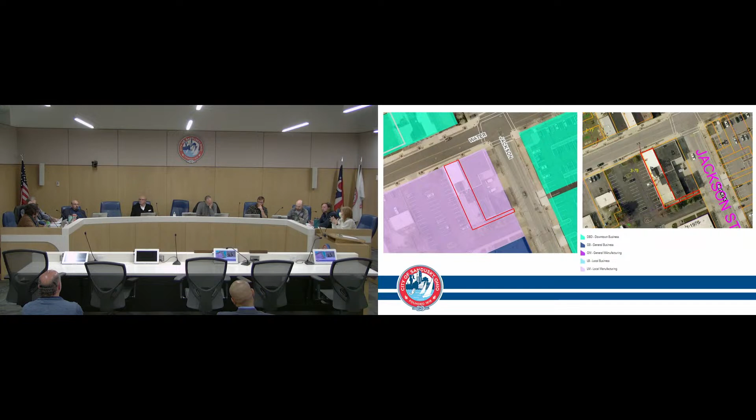Okay, I think as chair, I'm capable of making a motion. I'm going to move to approve the application as submitted and subject to staff recommendations. Second. Mr. Chairman, I see this request similar to that property at the end of Adams Street that we approved, Adams and Meigs. I think you're right on the edge, and it's similar to that, so I'll be voting yes.

It's been moved and seconded. Any further discussion or comments? Mr. Chairman? Yeah, Mr. Zula. Yeah, I was here for the downtown zoning discussion and formulating the map and everything, and I wish I remembered exactly what was discussed for that block. I don't remember what it was, but I can tell you that if I would have had my way, that area would have been rezoned.

So now you see the problems of spot zoning, or leaving things the way they are short term when it's inevitable that they change long term. But we're getting it done here, so it's fine. There's still manufacturing going on the corner there, and there's still manufacturing going on down the block.

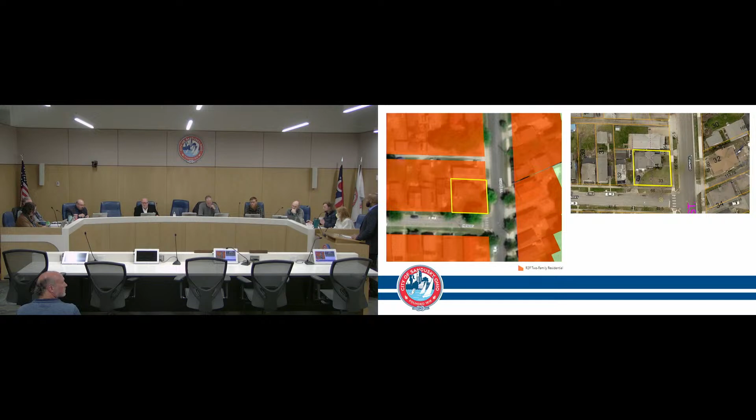Thank you. Any questions? Chairman, I'm not sure who to address this to, but this is a curious property, because it looks like Hendry Street. Let's see.

So one of the things that would have to happen here is you have to meet other standards to do this, or not, I don't know. If it were in an overlay district, you'd have to meet all kinds of standards, including a parking plan. Would the applicant have to do that here? Assuming our transient rental operations code gets reinstated swiftly, they would have to apply for a permit, and that includes a parking plan, in any district where it's permitted—that would be part of the permit. Right, I mean this would be a change of use, and if you did—I guess I don't know if I'm asking the right thing here.

Because they wouldn't be doing anything if they didn't propose doing anything to the site, you wouldn't need site plan approval. I'm not sure as a neighborhood business whether it would require a parking plan like it would if it was an overlay district, right? Yes, it would require a parking plan as part of the transient rental permitting process.

Okay, thank you for clarifying that. I have a question. The property has loads of curb appeal, and it's really a very beautiful house. Its setback, unusual for the neighborhood, is appealing too, but you could wind up paving that yard. Anyway, okay, thank you.

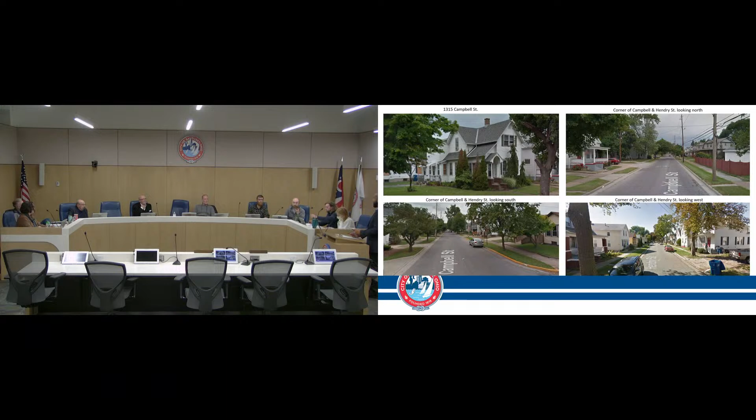Mr. Chairman, may I say something? Yes. I just wanted to say thanks for being here and spending your career here, and I'm glad you're here. We certainly don't love to say no, and I know it's hard to hear no, and we don't like to say no to investment. So please don't hesitate to give us a call, on your own behalf and on behalf of the folks you work for, to talk about where we can help you invest in the city. As you know, we do have districts, and had districts, and will soon again have districts where this is permitted. Am I getting this right? That would be correct. Some nice properties and some great opportunities.

Thank you, and I will add, enjoy the snow while you're here, while it's here, since you're from Florida. He lives here now. All right, Mr. Chairman. Yes, I just can't resist a little interjection.

Sorry, I started it. My daughter grew up here. When she graduated from college, she moved to California, hasn't really looked back, seldom visits. But apparently among her friends there's a community, maybe the phrase is digital nomads, these young tech stars who find they can work from virtually anywhere in the world, so they choose to do that. Among her friends, they think Sandusky is really ripe for a takeover. It's got interesting stuff, a modest cost of living, and they can't hardly believe this opportunity is out here. This is the kind of place they want to come, but they don't want to move here forever. They just want to come for a few months, like live a month in Denver and a month in Albuquerque, and others live six months in Thailand and six months in Cambodia. This goes right up the alley to a furnished apartment for a few months. So all you have to do is pass that 30 days.

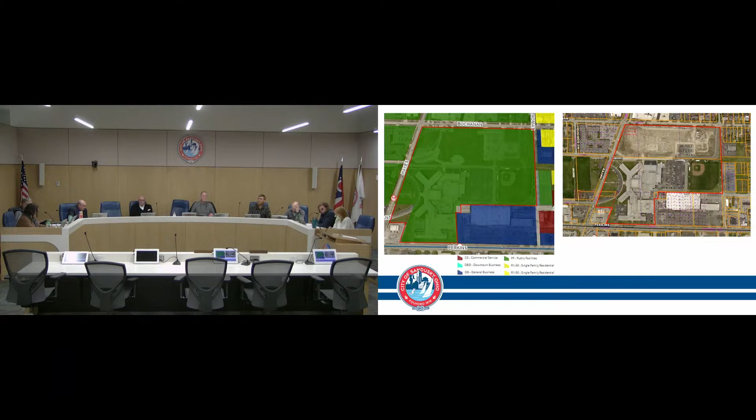The existing use of this site is campus for Sandusky City Schools, and the proposed use is also for Sandusky City Schools. They're proposing to add a natatorium attached to the current high school. The scope consists of renovating the existing pool locker rooms, converting the existing pool into an athletics multi-purpose room, family locker rooms, and constructing the new natatorium. The proposed plan will have a new seating capacity of 285 bleacher seats. The facility will be used by both students and the community. The hours of use are still to be determined. The proposed natatorium will be 12,200 square feet and will be placed on the east side of the existing high school building, on top of an existing parking lot.

If you look at the bottom right corner of the screen, that's the general area where it will be placed. This campus is approximately 13 acres. The total land coverage with this proposal included is 29.2%. Sandusky High School currently has 322 parking spaces, plus an agreement with an adjacent business for 30 extra spaces after hours, and 113 intermediate school spaces to the north. This proposal will remove approximately 56 parking spaces. The proposed height of this natatorium is going to be 26 feet.

The architect and the applicants are confident, after staff had talked with them, that the approximate 56 parking spaces being removed would not negatively impact the parking demand for the proposed facility or for school operations. Per the zoning code, no additional parking is required, because for public facilities it's up to the architect in a sense. The exact language is: public facilities and municipal education, number of spaces to be determined based on site development. So in this case, the architect is confident that the removal of the parking spaces won't negatively impact that.

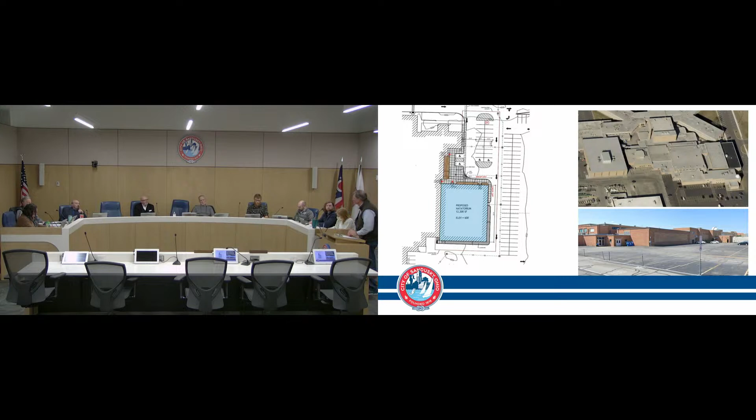I can answer that. Come up here, sir. Mr. Fike, I know who you are, and we all know, but maybe state your name for the record. I'm John Fike, I'm the owner's representative on this project.

Where we stand right now is funding has been completed. The school board has approved the design to start construction documents and get them completed. We hope to go out for bid in April, with construction starting hopefully in June, and then it's an 18-month project to finish.

If Mr. Miller wanted to contribute, he wouldn't be refused at this point. I can say right here, if you want to break out your wallet. The pledge was made long ago, and nobody has come knocking, asking for the check that we pledged. They will be once we get to the point where construction documents are completed.

Okay, any further questions? Mr. Chairman, I don't know if Mr. Fike is the one I should ask this. I get out on the street, having coffee or something, and get questions about whether this is the original plan or layout for this pool, or has it been downsized, or what is the final product going to be? The original plan, way back like 3 years ago, was to renovate the existing pool and add a pool.

Doing all the fundraising and then looking at all the space that was available, the footprint of what was going to go on there was much bigger than this, and the bigger the footprint, the more it costs. So with the money available, we cut it back to one large pool. We're going to eliminate the existing pool, keeping the locker rooms, and we're ending up with a pool, 8 lanes, which is exactly what we need for both the Sandusky City Schools competitive swimming, for their swim club, and for teaching our kids. Then in off hours, we can open it up for public use.

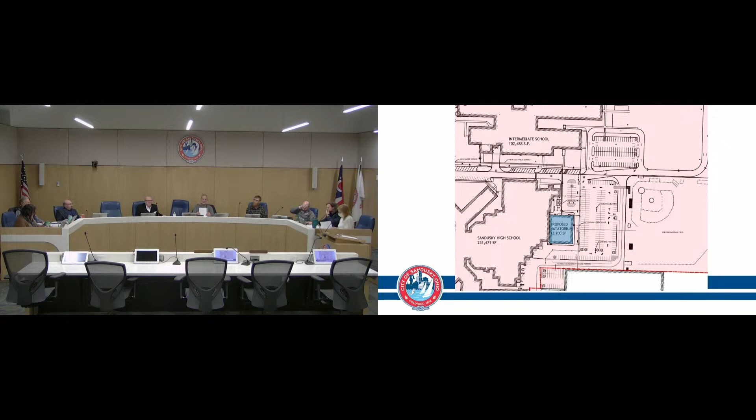Been moved and seconded. No further discussion, questions? I guess we'll call the question. Pete McGorry, yes. David Miller, yes. Mike Zuloff, yes. Connor Whalen, yes. Steve Pajali, yes. It's been passed. Congratulations, good luck going forward.

Next item on the agenda is a site plan submitted by Mr. Victor Huston to build a barber shop at 1502 Hayes Avenue. And perhaps the staff could educate us on that application. Yes, thank you, Mr. Chairman.

The site in question is zoned RRB residential business. The surrounding zoning to the north, east, south, and west is also RRB residential business. The surrounding uses of this property are both residential and business. The existing use of this lot is a vacant, undeveloped parcel. The proposed use is a business. The site is approximately 0.08 acres. The site abuts Hayes Avenue, which is a focus corridor in our comprehensive plan. This four-way corner historically has been a node for businesses and also residential use.

The applicant is proposing to buy the lot from the city and place a barber shop on the site. The property was obtained by the city of Sandusky in 2015 and is currently vacant in the city's land bank program. The new building will be approximately 14 feet by 32 feet, including 2 off-street parking spaces. The proposal would add a taxable parcel back into the auditor's database.

The parking standards are below the 25 required spaces to enable our landscaping requirement. However, staff has recommended low-level landscaping along the facades of Hayes and Osborne Streets. All area standards are satisfied per our zoning code. All yard regulations are satisfied. This is a permitted use. The zoning code does call for 2 off-street parking spaces.

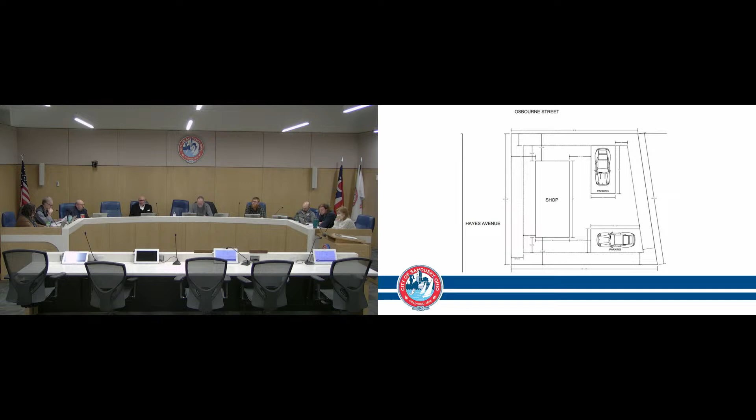So I'm seeing building 32 by 14. That includes the eaves, so it looks like the interior dimensions might be something on the order of 11 or 12 feet. Should be sufficient.

What was this, the zoning? It's residential business, so we're not worried about change of use or anything, or the legality of the use or anything.

So I think in principle I like the way the plan is conceived, in that we're not setting it back and putting a parking lot up front. We're doing a walkable, up to the sidewalk design. Customers are expected to walk up as much as drive up, right? So that follows a lot of the principles that we've been advocating.

As far as the aesthetics and so forth, that's highly subjective and not what we're interested in, at least in this venue or in this question. And I do agree that bringing the two cars in side by side would leave you some extra space for either future development or a lawn or something.

I think it would be important to condition this on fixing the apron so that you don't have excessive apron. It's a little bit of concrete work to make this look right. What we call the curb cut here resulting in an apron that's excessive. I don't remember the history there, but I think we should condition it on correcting the curb cut to match whatever is needed and nothing more.

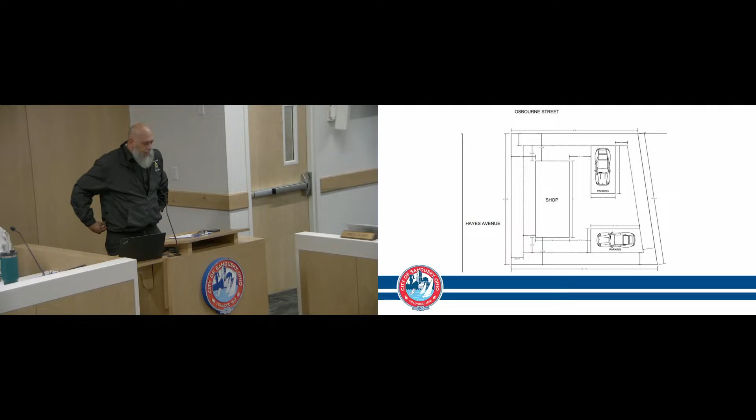I've been in the city since, well, I was born and raised here, on the south side of town. I worked in restaurant management for 25 years, left the area, came back, and I've operated a barbershop since 2011. Throughout, I've rented different places. I started out with Benny B's barbershop, worked with him, still friends. I worked in a few other locations, Stan Miller's Plaza out on Perkins Ave, and then recently on 1621.

Most of the places I've worked, I've been there for over 3-4 years in the concepts of working in these areas. The vision is the south side of town, when I grew up we had several barbershops in that area. Gordon's, Betty Lou's, Swain's Barbershop, Brown's, so there were 4 or 5 barbershops in that area, plus the Hardens was right there on Pierce and Hayes Avenue. Miss Coleman had actually taught at the high school, and she was on Campbell Street also. These were all within a block or two of each other, but they sustained a lot of families and brought a lot of memories in those areas.

These are family-owned businesses where the children grew up in them, and I was part of that. As a barbershop owner, I would like to bring that element back into the city. Things are changing, and I think we need to change with the time. That lot has been vacant for years, but I think it's a good lot for that purpose. You have an elementary school right down the street, and the middle school and high school several blocks down, and the kids are walking past there. All of them need haircuts.

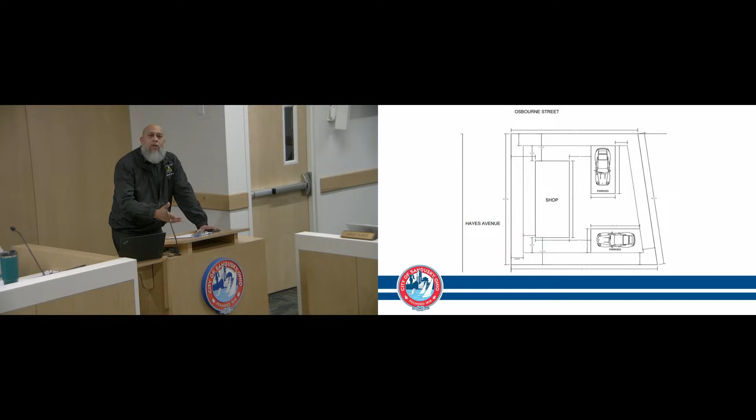The barbershop in itself is a place where a lot of kids can come in and get some direction, get a mentor there and other people. Not only is it going to do that, it employs 2 to 3 other people. It's not going to be a place associated with after-hours stuff that some barbershops are known for. I don't do that. I run a clean business. It's an LLC.

I've been operating that LLC since 2011. I pay my taxes on it.

Building-wise, I believe in the recommendations everyone has made on the parking, because I think it simplifies things a little bit. But the curb appeal, I like the setbacks on it, so I don't want to go to that zero variance where I can't have any curb appeal. You're coming down Hayes Avenue, you got the hospital right there, another business, and it's a main thoroughway right to downtown. Why would you just want a plain-faced building sitting on there? I would like a little shrubbery, and I believe low level, that should help.

So the vision is just to bring that neighborhood and that area back to some viability here in the city. That's my vision with that.

Like Alex said, this was June when I applied, but I had been looking at the building or that lot for several months before that. Before I made a move on it, it was just in June. So we've been going through all of that. We met with all the boards, the water department, building code, and so forth, to make sure this thing was doable. We're just at this point now.

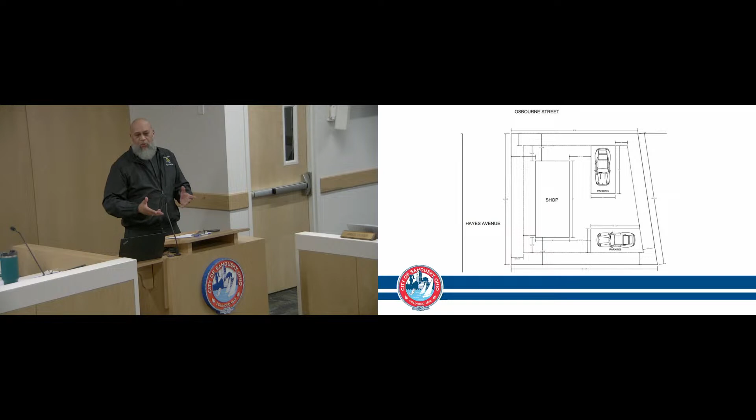So I'm ready to move forward if you guys are. It's just whether or not we're going to allow it to go. Those simple things you mentioned, my architect can go back in and change. The problem right now is he's on his honeymoon and won't be back for another 10 days, but I could have had that revamped and brought back in here. He's out, but when he comes back in, I could do that, and whatever else you need on there, I could have that taken care of. So if you have any other questions, I'll be glad to answer.

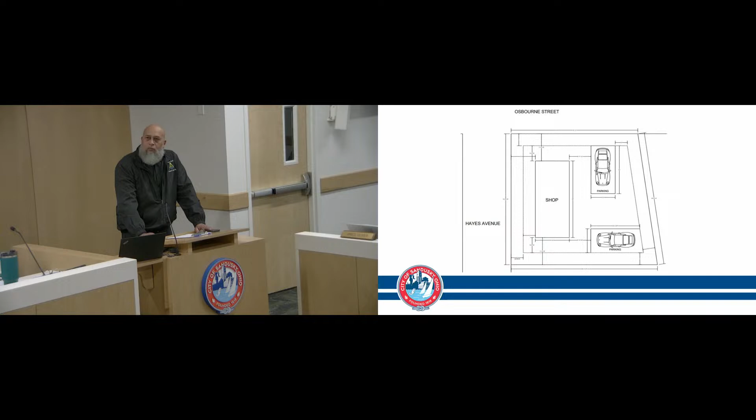Mr. Chairman, it sounds like you're amenable to making some adjustments. Absolutely. And I'll say that if you work with the staff, maybe on the walkable cities thing, the direction we're moving, I think you'll be happier and have a more valuable property in the long run if you considered it. Unfortunately the site plan isn't, so Hayes doesn't meet Osborne Square.

Yes, it's quite an obtuse angle. I think you'd be happier even if it wasn't even a square building, if you aligned the Osborne facade with the adjacent building, lined it up, and then aligned the Hayes Avenue facade with the adjacent building, which I think will take you a little closer to the sidewalk. I think you're gonna have something that looks like it belongs there.

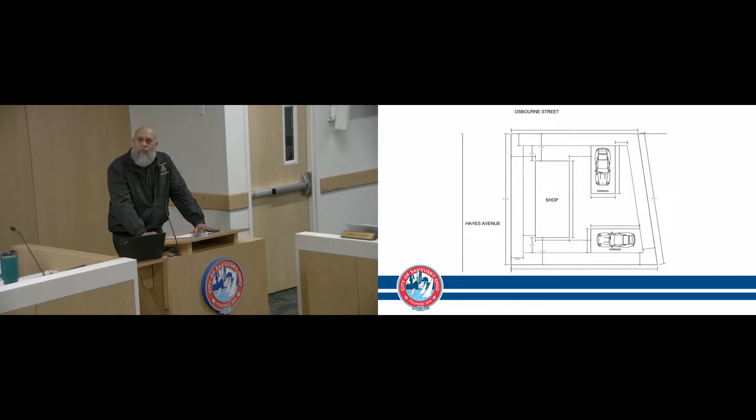Okay, it's just my thought. I'm not gonna tell you how to do it, it's not my job, but it's a thought, and it'll look like it belongs there. If you put it that way to your architect, aligning those facades with the adjacent buildings, I think you'll be happier in the long run. It's a little trickier, because it won't be a square building, but who cares, right? It'll look right.

Appreciate it, thank you. But in any event, maybe it'd be to your advantage if we table this so you can finalize your plan. Then there'd be no question, because if we approve this and then you start making changes, that could raise questions. If you still want to do a little work on it, we could table it for you if you want, and let you finalize your plans before we hold you to it. I'm just throwing that out there. I don't know what your reaction is, if you're in a hurry or not.

I think the sense is I can feel support from this body for you to build your barbershop, and we want it to be a success, so just a thought.

Do we have a motion? I kind of invited you to respond to the question of whether we could table it. I believe we have a motion that's been moved and seconded, is that correct? You can. Yeah, what's your point? That we have a motion that's been moved and seconded. Right, let's call for the vote.

You can table the discussion any time and take it up at another time. The question is, would the gentleman prefer some more time to work on this, or would you like an answer today? I would like an answer today. Thank you.

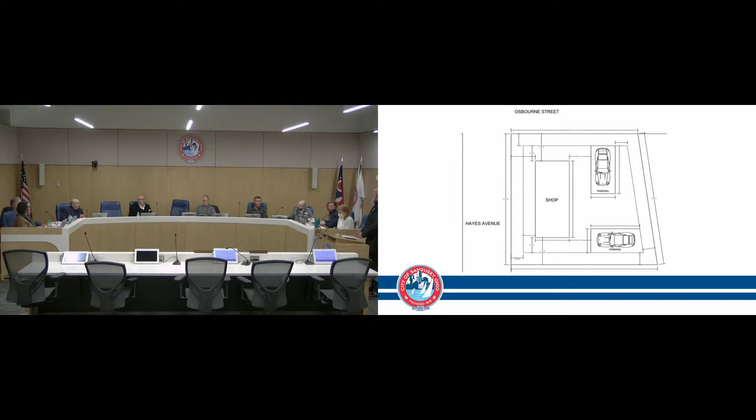It's been approved. Congratulations, good luck.

I wish I had some hair to come get a haircut. The beauty of it is, I built that business on straight razor shaves. I'm one of the only barbers in the city that gives a hot towel. So you're more than welcome to come. I never had one of those. Great experience. All right, that sounds wonderful.

Moving on. Saving forever, you're welcome. Moving on, a site plan has been submitted for 223 Meigs Street. Mr. John Hancock, on behalf of McGookey Properties LLC, has submitted that site plan for 223 Meigs Street for a building expansion at the Bait House Brewery.

Perhaps staff could educate us on that first, and then Mr. Hancock's here, I see, as well. Yes, thank you, Mr. Chairman.

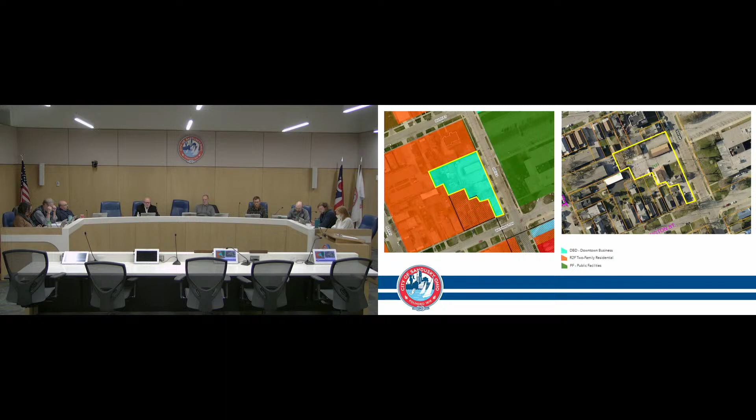The site in question tonight is zoned downtown business. The adjacent zoning to the north is two-family residential, to the east is public facilities, to the west is two-family residential, and to the south is two-family residential. The existing use of this site is both restaurant and brewery. The proposed use is staying a restaurant and brewery. The site sits on approximately 0.8167 acres, and with the addition proposes a coverage of 15.5%.

The applicant is constructing a building to expand seating for the brewery and restaurant on the site and move the second floor kitchen to the ground floor. The addition will include an additional bar and seating area. Let me get to the site plan. There it is. The proposed building addition will be 1 story with a height of 23 feet 2 inches.

The existing building area is 1,853 square feet. The proposed building addition is an additional 2,107 square feet, plus a potential enclosed patio of 877 square feet, for a total gross floor area per the application of 4,837 square feet.

The proposal contains 29 parking spaces plus 3 ADA spaces, equaling 32 total. The code calls for approximately 48 spaces. The proposed parking area coverage is 15,132. The landscaping area is 2,100 square feet.

The hours of operation have not been confirmed by the applicant, but staff has an assumption that it is going to stay as it currently is. The applicant is proposing to demolish an existing house on the site and a garage.

Staff talked to the applicant about the feasibility of moving this historic structure, believed to be built in the 1920s or 30s, to a nearby parcel. In the land bank program, there was some talk about outside investors doing that, but it seems to have fizzled out in the last few months. The house has not been moved as of yet, and no further discussions have taken place on moving it.

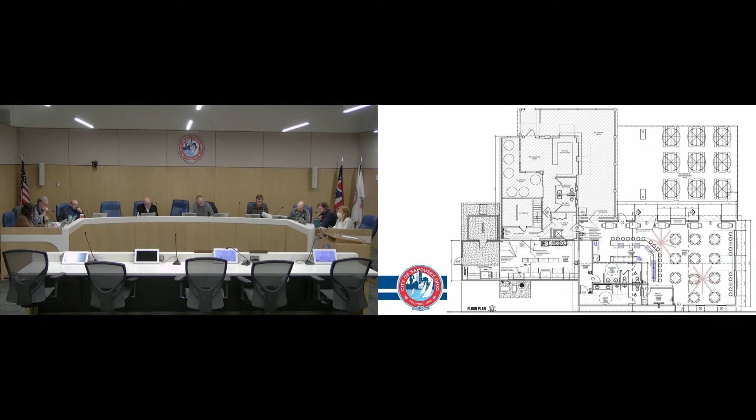In a December 6th, 2022 preliminary meeting, staff met with the applicant at the site to better understand the proposed concept for the addition, pedestrian circulation, parking needs, and site constraints. Staff has determined that the proposed building configuration is optimal for the flow and placement of the back of house needs, including kitchen and staff areas, and the location of the walk-in cooler and proposed kitchen. The parking demand for the site upon strict application of the code is 48 spaces.

However, the municipal building parking lot across the street has been utilized for Bait House Brewery overflow parking for some time. There's an agreement in place, and that parking lot houses approximately 100 spaces. Further, the recently completed Meigs Street project has also added additional on-street spaces. Given these ample parking opportunities in close proximity for customers, staff recommends approval of the proposed parking counts, including the enhanced numbers recommended by the engineering staff, which I'll touch on in a bit.

To meet the landscaping requirements, a 100 square foot island is required as part of the parking lot improvements, as well as paving the existing gravel lot and any additional parking area that is currently grass or where that garage is currently existing.

Due to close proximity of the Sandusky Bay pathway, which was newly installed, staff is suggesting to the applicant to add bike racks throughout the parking lot in close proximity to the entrance area that would accommodate up to 6 bicycles. There's a diagram showcasing a good area for those potential bike parking additions.

The next steps of this process, if approved tonight, include additional pieces to this request: a side setback variance with the Board of Zoning Appeals and a minimum buildable lot variance. This is going to create 4 lots that are now not meeting our current area and yard requirements for an R2F residentially zoned parcel, so that is one variance. The other variance is a 15-foot minimum side yard setback for a business use adjacent to a residentially zoned parcel. The proposal is 7.2 feet for one section, 5.7 feet, and 6.1 feet for others, so getting the variance for that is another piece of the puzzle.

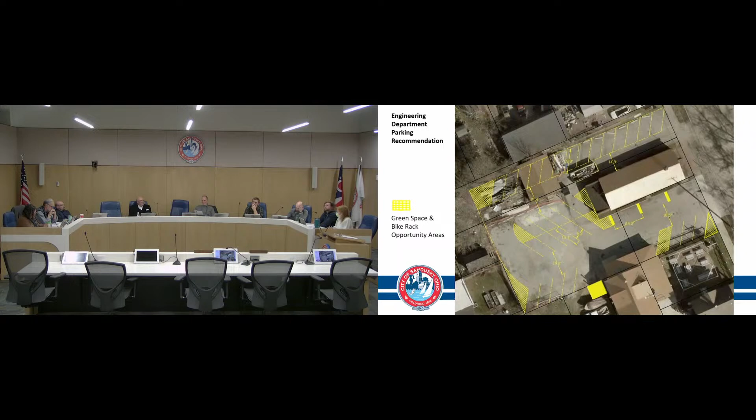Does anybody on the commission have questions of staff? One comment: they did push back on engineering's recommendation for the parking layout, so you might want to discuss that with the applicant to understand what they're advocating for. They continue to advocate that this is the better layout for their needs. So you're asking that the applicant explain their current position? I was just posing that to the chair and the board. I'm just trying to understand your point. You'd like them to explain their current position as to those suggestions or recommendations? Yeah, that would give you all the information for evaluation of that case.

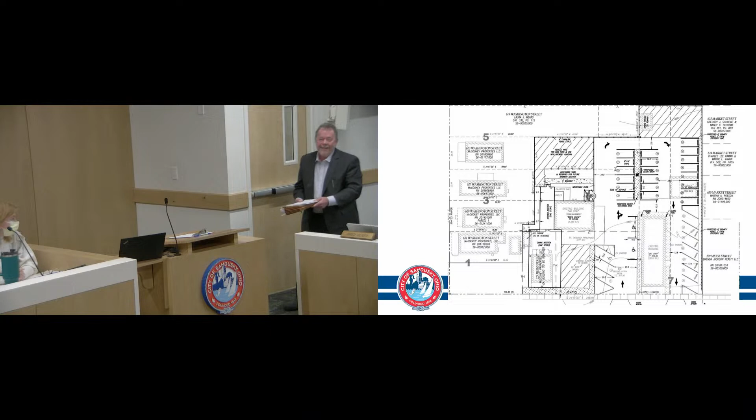Mr. Hancock or Mr. McGookey, or both of you? We're going to double team you. Okay. And I happen to know both of you, but just for the record, maybe you could both state your name and addresses. Dan McGookey, and then John Hancock, 1205 Cedar Point Road, Sandusky. John Hancock, my office is at 326 East Market Street. I still have an office there.

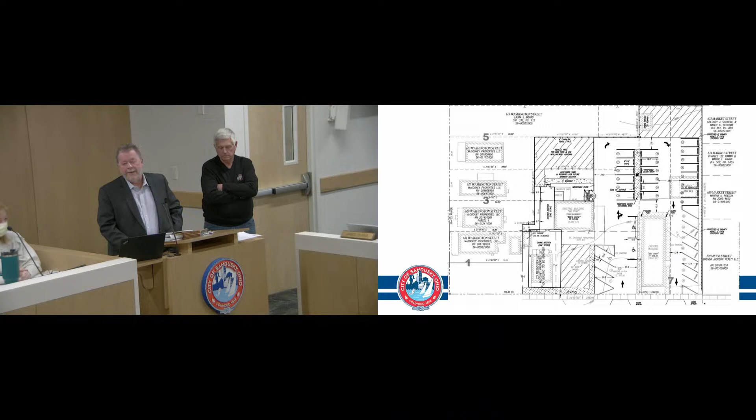I just want to thank the commission again, as part of the total city government, which we've dealt with since the Bait House has been in operation for almost 5 years. I can't overstate the cooperation and the professionalism that we've met with. We just started with this little, I hate to call it hole-in-the-wall operation. It's still kind of a hole-in-the-wall operation, but it's a bigger one now. We want to get bigger, and we want to continue to be a good corporate citizen of Sandusky. I'm so excited as a lifelong resident, soon to be 70 years old in 2 weeks. What is going on in Sandusky right now is just incredible. Ten years ago, when I was 60 years old, I never thought this would happen.

So with that said, Aaron, and particularly the staff, we've received tremendous assistance. The staff came out and met with us, and their interest and questions were very perceptive. I just can't overstate the welcome we've had, and it continues with the city of Sandusky. So thank you all. I don't know if I'd call it pushback. That's why I wanted John to come up here as the engineer.

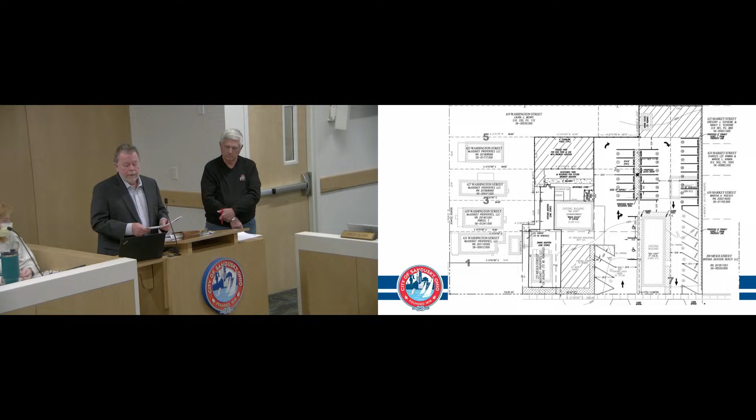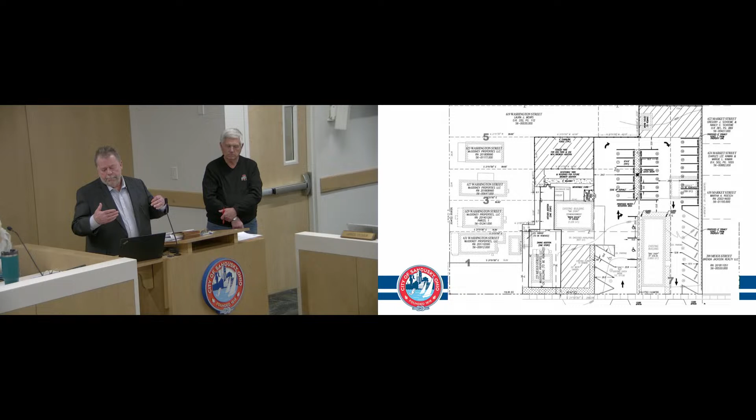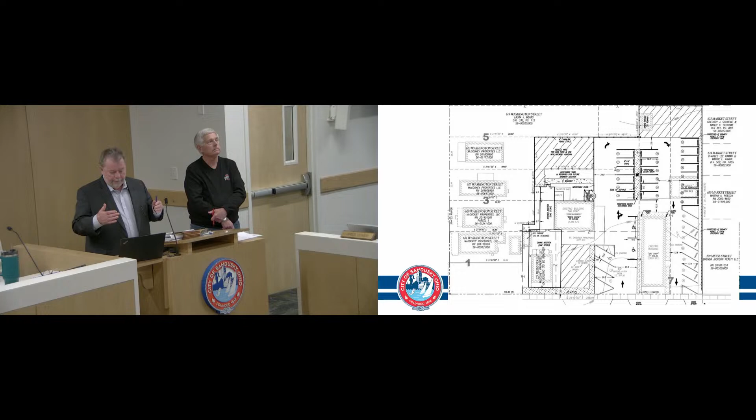As far as the parking, I guess John can pick it up here. The plan John drew up called for the back, or west side of the parking lot where there's now gravel, to be straight-in parking. The engineering department came back and said it creates 2 more spots, but for whatever reason wanted to make that angled parking. John has had further discussions with Josh Schneider at engineering, and I think they've worked that up. I'll let John speak to that.

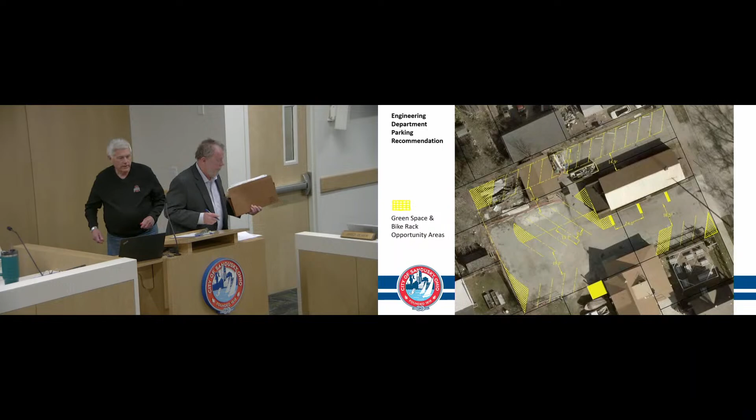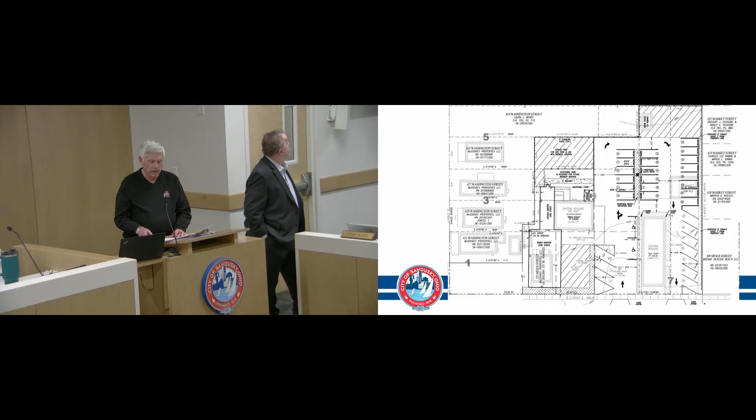Thank you. As to the parking scheme, we appreciate the suggestions that engineering made, and that planning staff had asked to be looked at, in terms of providing angled spots on this layout. It did gain 2 more parking spots, but an angled layout did several things we wanted to avoid. One was that it lost a regularly configured center median, which provides our landscaping island requirements. We also need that island for stormwater control and stormwater quality. The head-in spaces give us a better configuration for that island.

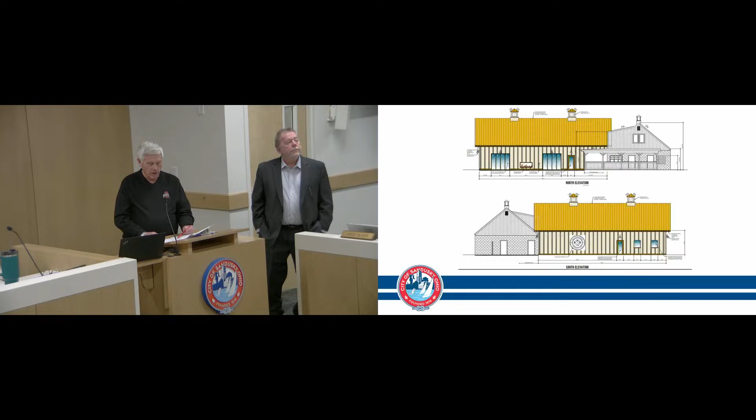So with your permission, in presenting the final plan to engineering, we could try to incorporate some of these suggestions, but we had good reasons for presenting this layout as we have it now. It also, just as a note, we're basically keeping the existing parking that's there and essentially just expanding the head-in parking as it's used in the back.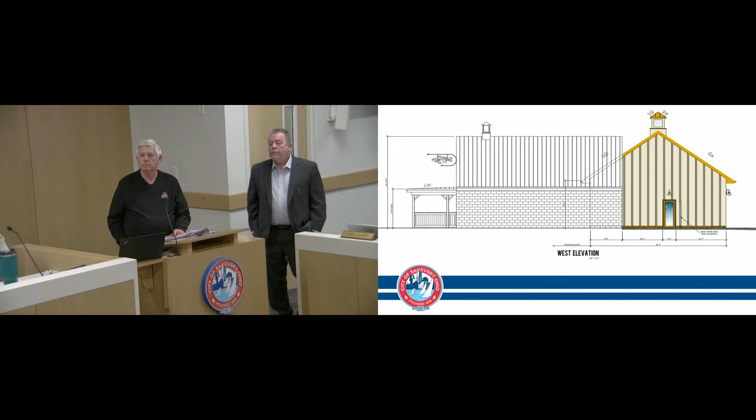So the city, of course, has standards for driveways, parking widths, and all that stuff. Does your perpendicular parking plan meet that? I've been seeing a nod from our chief planner that it does. I don't remember a lot of precedents where the city redesigned it for the applicant.

But it's good to have the interplay and different ideas on these things. Sure, we don't always catch everything and consider everything we should consider sometimes too. So Mr. Chairman, how's that for being contrite? Mr. Jolly, I always like to support staff when I can.

I guess I've got a question for Ms. Blair. This was Josh's recommendation, right? He didn't say that their concept wouldn't work. That's correct. We were on observation, because the way the traffic comes in, you come in and then have to move your vehicle around. The way Josh was proposing, you could actually see if there are parking spaces if you look down it as a driver. But I think the applicant explained their reasoning fully for why they landed on the layout that they landed on.

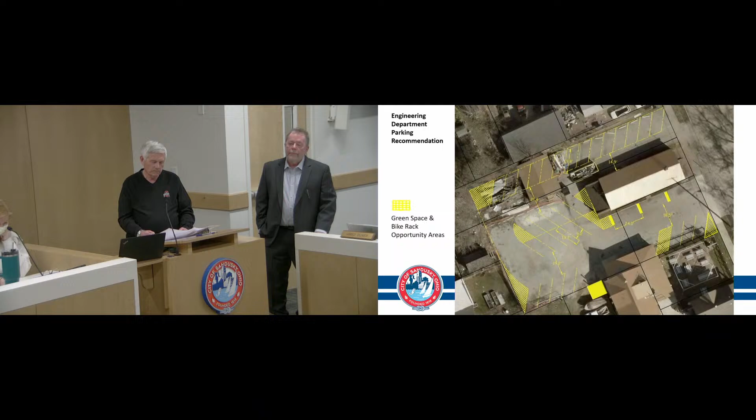I don't know, if I was trying to turn those tight corners, I'd rather have 10-foot spots, not 9-foot spots, but given the size of your average crew cab, flare side pickup truck these days, but again, you got to live with it. They can park across the street, so.

Yeah, park in the police department. Right, on the street, better yet, right? Besides, half of them will have boat trailers, so.

In any event, if it was mine, since if the engineering department can give an opinion, I can't. If it was mine, I'd give up a couple spots and go 10 feet, but other than that, it's your lot, and I'm kind of inclined to let the applicant figure out what they need. I don't see it.

Normally, I'm concerned with conflicts with other enterprises. So if you have a big business and you have insufficient parking, you're creating conflicts, you're creating problems for the neighbors. I'm not sure that's what we're looking at yet. I'm inclined to give the applicant what they're asking for.

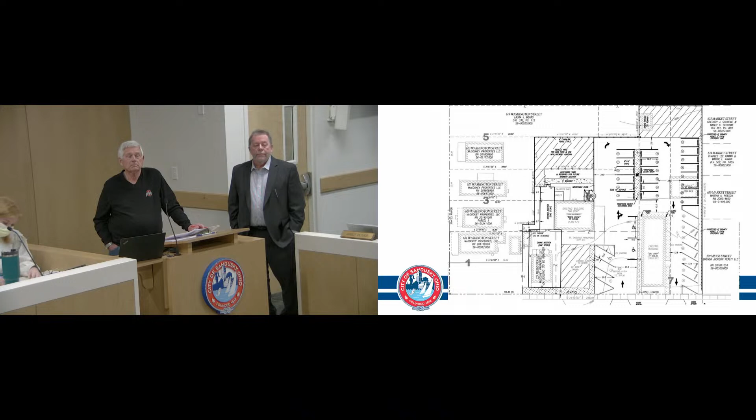Mr. Chairman, I would move to approve this application with the comments that staff has made, with the exception that their parking plan can move forward the way they configured it. Second. Thank you. That's been moved and seconded. Any further discussion?

Mr. Chairman, yes, Mr. Miller. He had me at water quality and stormwater management.

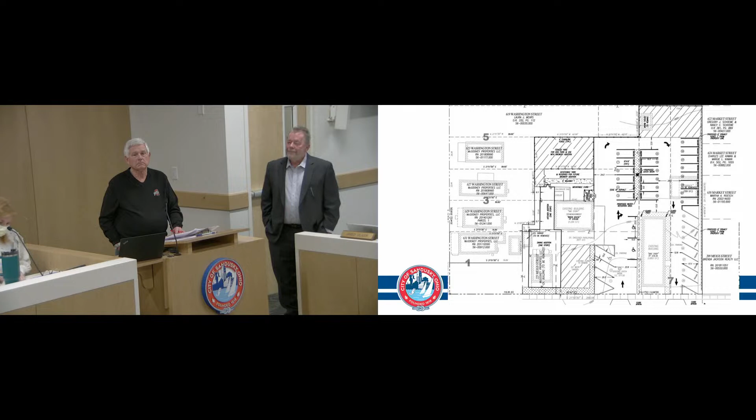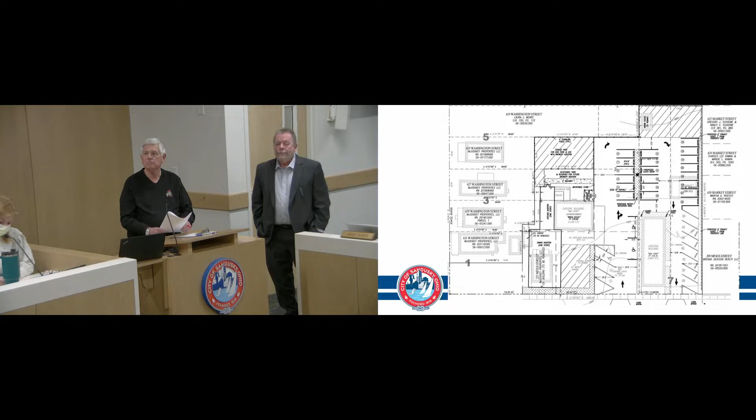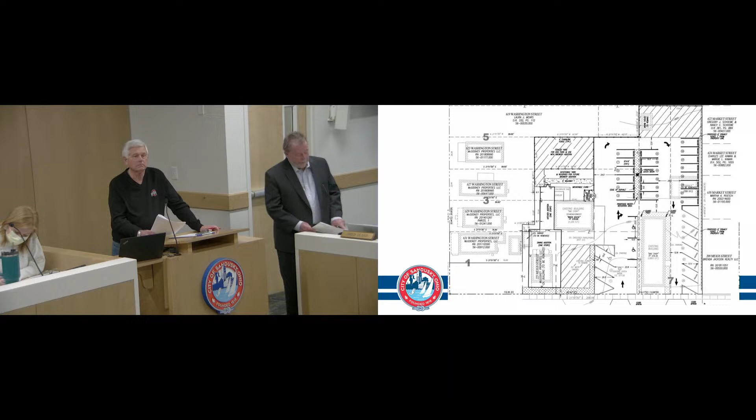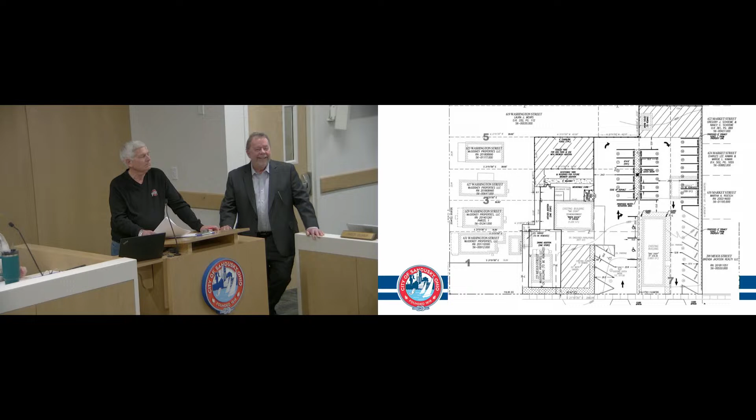Mr. Chairman, I would just like to say that I appreciate, Mr. McGookie, everything you're doing on Market Street there. I mean, that took a lot of courage. I always thought it would be a good idea, but I thought the bar would go in the original bait shop and they'd leave the minnow with the water going and stuff, but I guess it wasn't big enough. But yeah, that's a nice addition to Market Street.

Very much. I hear the same thing from my wife every night about thanking me for my courage. So I'm kidding. But I just landed. I mean, and again, I want to repeat that it's to no small extent, we're there and we've done so well because of all the help that we've gotten from the city and from the Planning Commission. So we just want to keep going.

Can we look forward to an Airbnb in the bait shop? What's that? Can we look forward to an Airbnb in the bait shop? In the bait shop? Yeah, not in the bait shop, but somewhere on Washington. So, I was just wondering if the judge wanted to add a few words.

I want to thank you too, and I can see you're very diligent at the questions that you ask. They're very good questions, and you put a lot of thought into it, and it takes a long time to get through your meetings, and so I thank you for that.

Also, I'd like to add that I actually, as the probate judge, I had a lot of involvement with the planning of the Sandusky pool, because a lot of that money came from the Y Foundation that was now defunct, and it was a pool fundraiser for the Y, and so I worked with the Community Foundation and the other people from the Y Foundation and all that, because my concern for that pool was to be accessible to the public too. And so I was finally satisfied after putting through quite a few hoops and hurdles, and so I signed off on that plan. And so I think, you know, what you did tonight for the pool advancement is really good too.

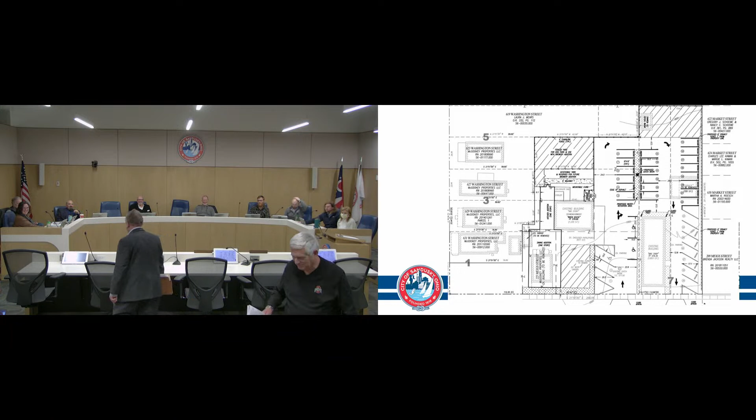So, thank you, Your Honor. See you guys. Okay, good luck, guys. I was the one that had the courage to marry him. That I can't. There's the comment. Thank you. All right.

Okay, I think we got one more item on the agenda. Under new business, Superior Street right-of-way. I think Mr. Holliday has something to say.

Good evening, commissioners. My name is Jonathan Holliday, Director of Community Development for the City of Sandusky. As some of you may know, we were asked last year by the County Health Department to help improve their entranceway on Superior Street. The main objectives were to improve signage and create a pedestrian walkway leading to their facility. We determined the best way to accomplish that was to purchase the two-family home on the corner of Superior and Monroe, 3201 West Monroe Street.

So the city did that last year. We partnered with the County Land Bank to have that house demolished, and that work was just recently completed. We then entered into a long-term lease with the health department, whereby they'll have the ability to install their sign and pay us back for the acquisition costs over five years, at which time the property will transfer to the health department. That lease did allow us to expand the right-of-way at this location.

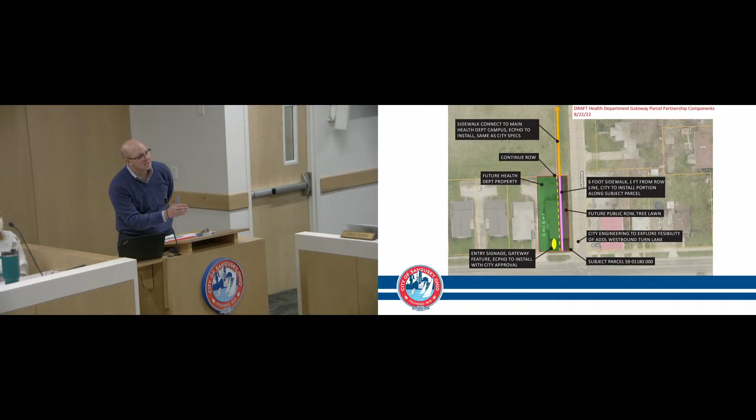In working with Public Works and Engineering, we determined that expanding the Superior Street right-of-way would be preferable at this location, allowing for continuous right-of-way on the western side of Superior Street. The current right-of-way has a jog in it as it approaches Monroe. This will create a continuous right-of-way along the western side, allowing a sidewalk fully aligned up to the health department campus. It also creates a continuous, consistent tree lawn, and provides the ability to expand the roadway to add another lane if traffic volumes ever warranted that.

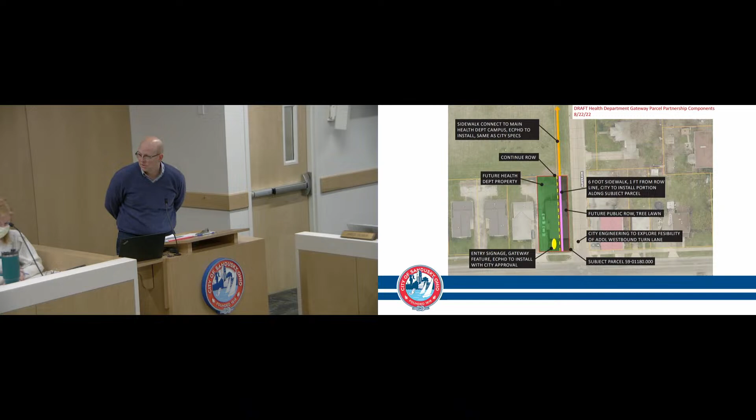So I'm here this evening to answer any questions you may have on this proposal, and ask for your approval and recommendation so we can proceed with the right-of-way expansion. I believe there's a plat map here in the presentation to show further detail. Thanks for your consideration.

I'll add one comment. This showed up in your packet as a memorandum from the Public Works Department. That's how the right-of-way dedications have been handled in the past, so that's where that was.

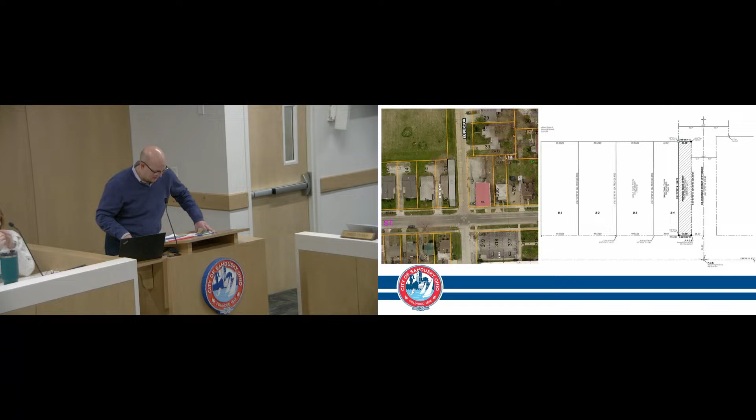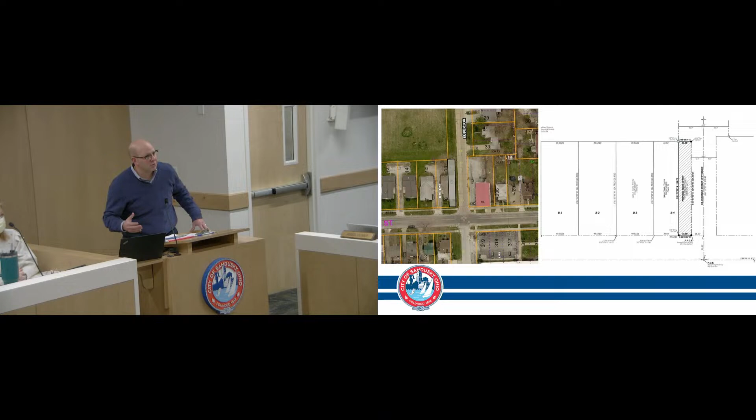The health department's already got something lined up to buy that corner parcel there. Correct, we've entered into a lease with the health department so they can install their signage. So the city owns that corner? Correct, yes. We purchased that corner last year, and we've since torn the house down. Eventually the remainder of the property, anything we don't dedicate as right-of-way, will ultimately transfer to the health department at the end of about five years.

So we're looking for a motion to approve this plat. So moved. Second. Any further questions or discussion?

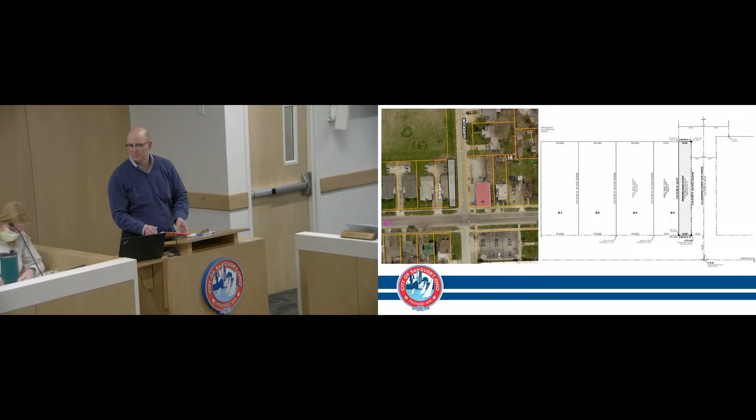Maybe call the question on that motion. Mike Zuloff, yes. Connor Whalen, yes. Pete McGorry, yes. Steve Pajali, yes. David Miller, yes.

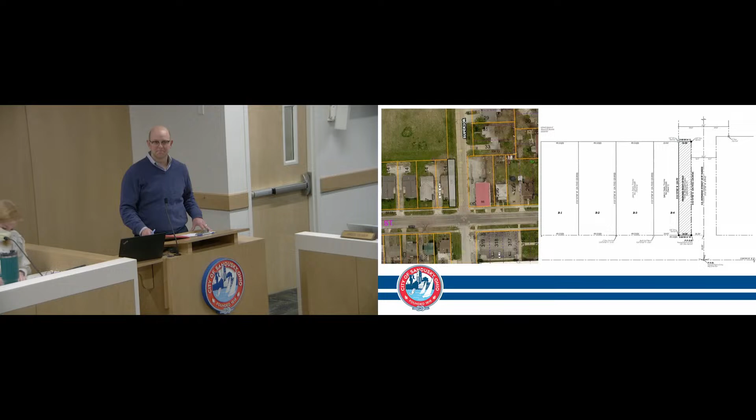I guess congratulations. Thank you. Okay, adjourn?

I guess that covers everything on the agenda. Anybody care to make a motion to adjourn? Mr. Chairman, I believe we do have a member of the audience that would like to speak. Oh, okay, sure, you may. Not on the agenda, but go ahead.

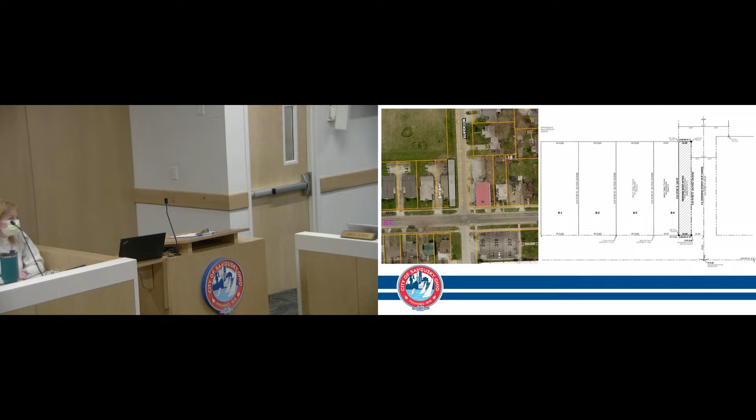Okay, thank you. My name is Sue Doherty, and I'm here representing Serving Our Seniors. I was here in January when the recommendation was made by Ohio leadership that the commission consider modifying ordinances to allow for ADUs, or accessory dwelling units. I just wanted to continue to let you know that I am still in favor of that, and I hope the recommendation is being given consideration.

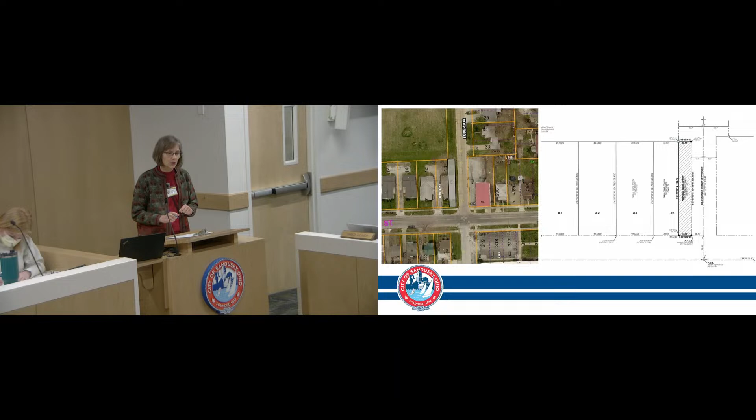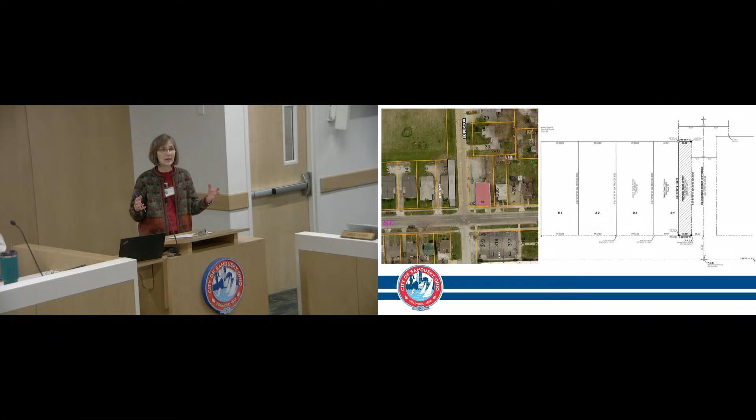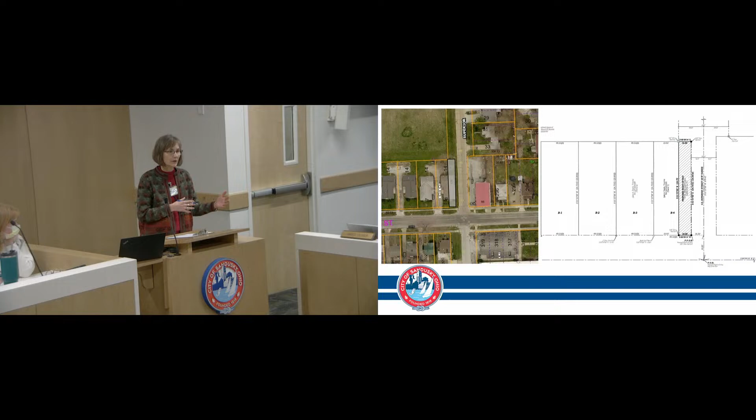I just had a conversation at work. At Serving Our Seniors, we have somebody providing a service called Money Mentoring. It's basically helping retirees look at what they can do to make ends meet with inflation and the high cost of rent. It's becoming more difficult for more of our clients, and we serve the full spectrum, not just low-income older adults. We had two cases today discussed at morning meeting of retirees who have the help of our coworker Donna Green, who is serving as a money mentor, and in both cases they're really desperate situations.

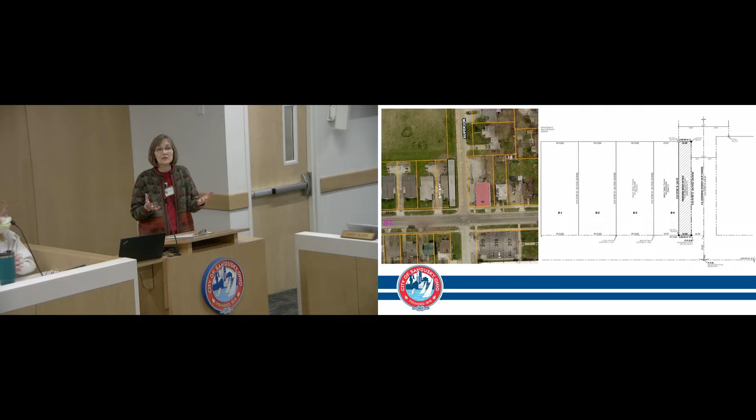One person is going to have to leave her condominium, and the other person already lost her apartment and is living with a relative, and has to leave because the apartment lease will not allow for 2 individuals to live in that apartment. And there is no place for them to go. We are in touch with the senior housing projects and the other apartments, and there just is nowhere to go. We really do need to find a way to increase the supply of housing.

Because when there's more housing, I believe it's fair to estimate that rental rates will go down. So I'm a strong proponent for finding a way to offer those who are retired an affordable place to live, especially if they are not low income. Those individuals need help too, but the people who are just over the brink of low income really don't have an alternative. So please continue to consider that recommendation, and I thank you for hearing my plea.

There's a danger of solving the wrong problem by lowering the standards to provide more housing. I know people with 3 and 4 houses that occupy them at will, and they're empty most of the year. We've created a society where some people can afford multiple houses all over the planet, and some people can't afford the rent for a studio or anything decent, right?